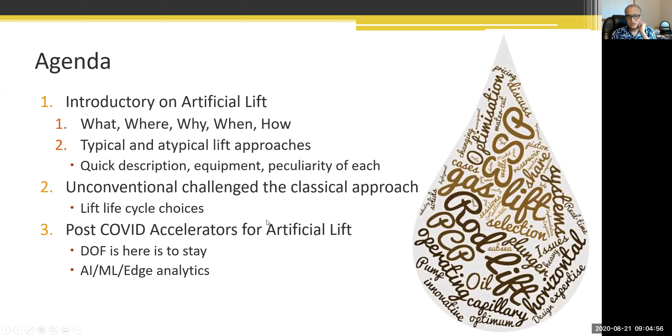Initially, when I was discussing with Salim doing this, I was thinking of doing a workshop. And I might still do that. And that workshop would be more like all of us trying to do something with machine learning. And maybe first quarter next year, we'll plan something along those lines once I have the necessary material in place.

So first things first: what, where, why, when, and how. And if you do not want to follow the rest of this material, your takeaway from this subsection should be: any oil or gas well in any operating environment, anywhere in the world, needs one or more lift systems during its life cycle. That's my one statement that tells you how important this technology is. Another thing that I should have added here is that most of the wells in the world stay on artificial lift for most of their life cycle. There are very few wells in the world that do not get impacted by artificial lift.

Considerations: when you talk about artificial lift, you have to focus mostly on the hydraulics. Of course, you have to know the mechanical, electrical side of the equation, and environmental, of course. And that's what makes artificial lift somewhat unique, in the sense that there is not a single discipline that teaches you. Even though people say, I'm a production engineer, you'll find that they will always have a niche area that they know about. Even within the artificial lift community, you'll find that some people focus exclusively on electrical submersible pumps, others focus on gas lift, and so on and so forth, because of this diversity of the knowledge that is required.

But the base thing is that we need to learn to work with the boundaries. Some of the boundaries are natural boundaries, meaning the reservoir pressure, whatever the reservoir parameters are, and some are man-made. Man-made meaning we have to focus on what type of infrastructure we are putting in at the surface. And then the last part is that artificial lift comes into being because we are trying to balance business needs against the system constraints, meaning what the reservoir can give us, what our facilities allow us to produce, versus what the business needs are. And that is the gap that artificial lift tries to fill in. So with that, takeaways.

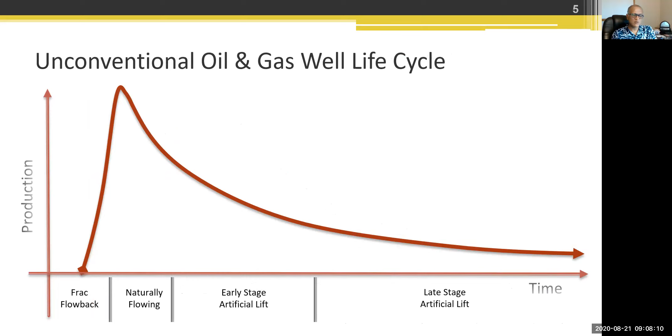But we have to keep in mind that this production decline is what forces us to think about artificial lift. Now, if the question comes up, how many wells in the world are in artificial lift? The statistics in the US have been fairly constant. World Oil has stopped publishing the statistics since '18 or so. But roughly every year they come back and say that between 500 and 550,000 wells in the US are on artificial lift. Okay, this number has remained constant in the US.

And my gut, based on the estimates that I see in the literature, is that this number has not changed even after 2017 or '18. On the contrary, that percentage might have gone up, I would think. Worldwide, this is an estimate from one of the service companies in 2013. The numbers in the US, it says about 540,000 or so. My estimate based on my consulting work and collaboration with other partners in the world is that the numbers in the US are fairly static, but in the rest of the world, it is increasing rapidly.

For example, I'm working with one Middle Eastern national oil company, and we are looking at just 1,800 artificially lifted wells in one country. And that is just one lift type, right? 1,800. I estimate that that particular country has more than 2,500 wells on artificial lift, whereas here we are showing almost the entire region having 2,600.

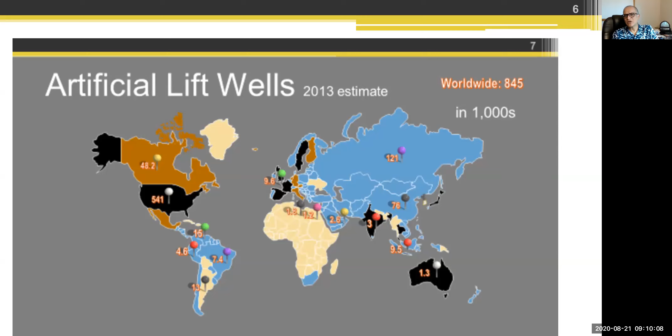Okay. So why do you need an artificial lift system? You need an artificial lift system in greenfield and unconventional for production acceleration. Otherwise, you can say that we have some field development challenges, infill drilling, EOR strategy changes. That's when you'll want to put artificial lift. But the conventional view has been that whenever we have tired production, reservoir pressure declines, water cut increases, that's when things get difficult. And I'll come back to this in a minute. So we need artificial lift to help the tired production.

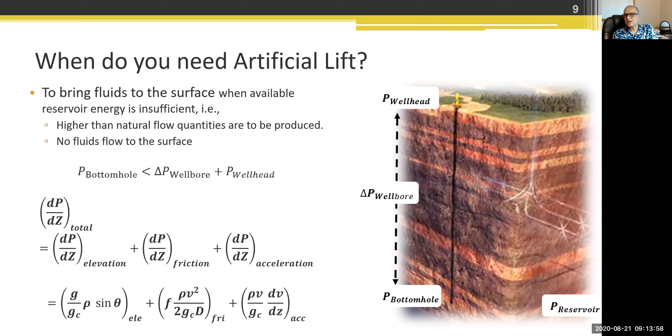So this is the only equation that I'm going to show in this presentation, just to make a point that this is all about the hydraulics, artificial lift. And you have to throw in some electrical engineering or some mechanical engineering, depending upon the lift method that you are looking at.

Here is a picture of the subsea. It is slightly more challenging, but the principle remains the same. You have to account for the wellbore losses. In case of subsea, you have to account for the losses from the seabed all the way to the topside. But fundamentally, all you are trying to do is how do we provide what is considered additional total dynamic head, or TDH.

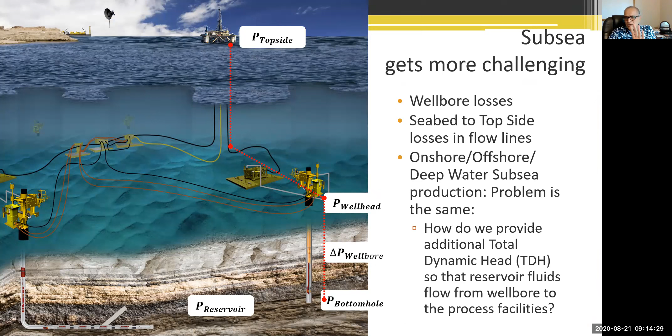So this is one new term. You said, wait, you never talked about TDH. What is TDH? Okay, so TDH is, as this picture shows, you have one boundary, which is the reservoir pressure, another boundary, which is the wellhead pressure. Now this wellhead pressure is influenced by your surface facilities, what type of flow lines you have, what type of separation pressures you need to hold. So these are the two boundaries that I would keep focus on for the time being.

Then as the fluids flow through the reservoir, you have bottom hole flowing pressure. Most of the artificial lift engineers focus on the hydraulics in this area, right? And they typically use a simpler expression for the reservoir flow, which is some kind of Vogel expression or straight line PI in some cases even.

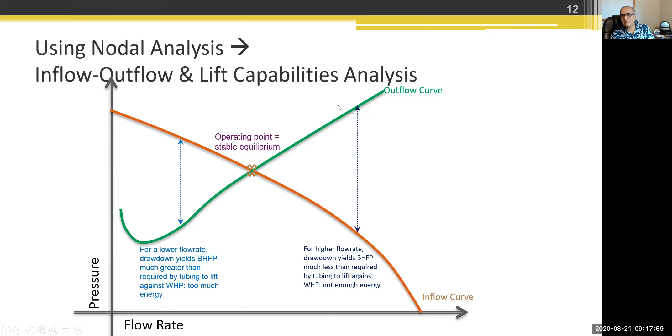And I do not want to belabor this point, but just one point: if you want to produce to the left of this equilibrium point, then reservoir energy is higher than what you need. If you want to produce to the right of it, then reservoir energy is less than what we need to produce. And typically, this is what you would identify as the total dynamic head. So instead of producing this quantity, let's say you want to produce this quantity, then this much additional boost you'll have to provide, right?

So this is the total dynamic head or boost required from the artificial lift system for that particular flow rate. The actual picture is slightly more complex than that, but for the purpose of our discussion here, this is what I'm talking about, how one can decide on the lift capabilities or what are the lift requirements, right? But the nodal analysis is the tool, okay? And again, I cannot emphasize this enough.

Any of these plots are just at one point in time, meaning one set of conditions. One reservoir pressure, one wellhead pressure, one water cut, one gas oil ratio, one tubing size, on and on and on. As we all know, things do change. And what changes? I'll come to that in a few slides, right?

So now let me go to the second part of my presentation where, now that we know why, what, where, when, how of the artificial lift, I will now focus more on how, right? So I'll give you some idea about what are the different types of artificial lift methods, what are the typical surface and downhole equipment requirements, and some consideration. This is the part where we'll be kind of sitting in the bullet train as the different stations will pass by.

Your takeaways from this section should be that these are all good lift methods when you apply them in the right context. That is one of the biggest problems. Most of the time, people have this mindset that just drop it and forget it. That is what we want to do. But in case of lift method, what may be good today may not be good tomorrow or over the entire lifespan.

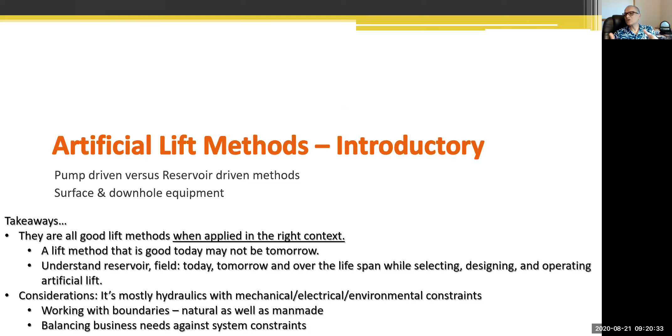So consideration, again, I'll repeat this, that most of these lift methods, you require some mechanical, electrical, and environmental. And by environmental, I mean broader than just the Greenpeace movement. We are talking about what is the environment inside the wellbore, what type of corrosivity conditions are there. And that is what dictates what type of chemical program you need, what type of material selection you have to make, and so on.

So when you think about artificial lift method, traditionally, what you're looking at are about 7 pictures, but effectively there are 8 lift methods. And I'll put the things in motion. The first one is the rod pump. That is the ubiquitous symbol of the industry. And that is where the maximum number of installations are in the world on this lift method. I'll not spend too much time describing each lift method. I'm just trying to bring up the picture to give you an idea about what type of different downhole pumping motions occur with different lift methods.

So the second one in the middle of the screen right now you're looking at is a progressing cavity pumping, or PCP. The third one is the electrical submersible pumping, and this will be in the loop, so you'll keep on seeing what is happening. The fourth one is hydraulic jet and hydraulic piston pumping. The fifth one is the gas lift. The sixth one is the plunger lift. The seventh one is the capillary injection. Let me cut down on some of these volumes here.

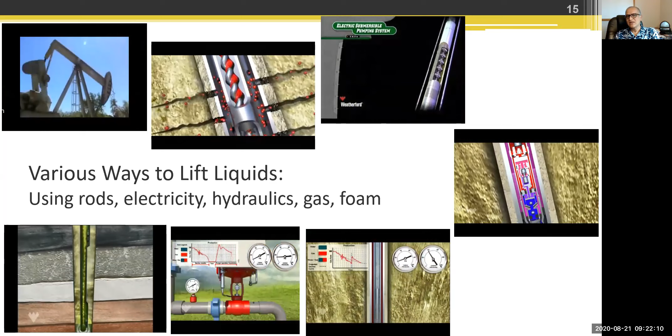Okay, so I'm going to keep this slide for slightly longer than what I would keep, just to give an idea about how these different lift methods have different surface setups and downhole setups, right? And as I describe the other individual lift methods, pay attention to that. If I have to use one particular lift method, do I need a workover rig or can I use it with wireline when I have to repair it? And these are the considerations that production engineers need to constantly work with when the lift system is in operation.

And here is one thing I'll tell you. Most of the production engineers are not traditionally taught these things. They somehow learn it from the old field hands. Because when you go to the engineering school, even if you go to petroleum engineering school, what you're taught are typically just some of the outlines. You're taught some of the design processes very superficially. And I know that because I am teaching one of those artificial lift classes, right?

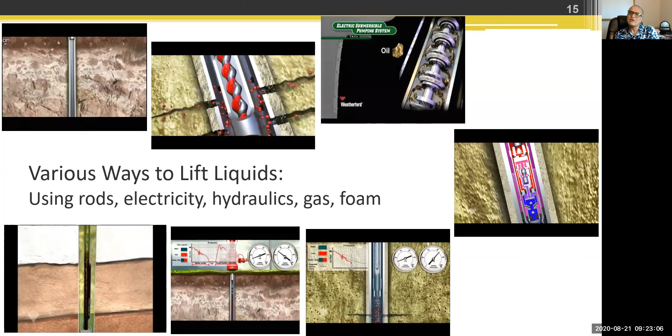But when the same engineer goes to the field, all of a sudden they are exposed to so many field conditions, so many constraints that they somehow get lost. And then they end up making suboptimal choices in spite of that training. And this is one of the things that I've been constantly discussing in the last 15 to 20 years of my teaching all over the world, not only artificial lift, but different nuances of that.

Okay, so when we come back to the different classification of these lift methods, we can put them in two buckets in terms of the energy source. On the left side, you're looking at what is called plunger lift, foam lift, and gas lift. These three lift methods are primarily driven from the reservoir energy consideration, and the lift methods on the right side,

Just a sec, I see something going on in the chat. Hopefully I'm not expected to answer those right now. If we can keep those questions until the end, that will be good. I don't know, what is our protocol? Are we breaking somewhere in between for some questions? No, Rajan, as you go on, people can put their questions in the chat anytime, but once you finish your presentation, after that, we'll go with the Q&A. Okay, perfect. Very good, thank you.

So coming back to this slide, what I'm trying to point out here is that depending upon how we are providing energy to the artificial lift, we can put them in two buckets. So on the left side, plunger, foam, and gas lift are primarily reservoir-driven methods, meaning the energy source is primarily the reservoir. Whereas on the right side, all the lift methods have pump in their name. Rod pump, piston pump, progressing cavity pump, jet pump, electrical submersible pump.

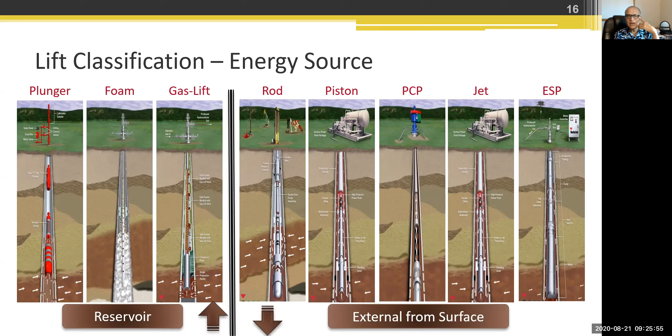Okay. Now let me give you another way of classifying these lift methods, which is based on the liquid production capacity. Again, lift works on lifting the liquid. It doesn't care whether it is lifting oil or water. It has to lift liquid. And one of the secrets of the world, and not a secret, we all know that most of the wells in the world are lifting a lot more water than oil, right? Particularly in North America, and to a large extent, I'm seeing that trend around the globe also.

So in terms of the liquid production capacity, plunger and foam lift fall into the lower end of the spectrum, meaning typically less than a couple of 100 barrels of production. You might have a few outliers here and there that might say, I can produce 300 or 400. But most of the wells on plunger and foam lift would be typically producing less than 10 to 20 barrels per day. On the other end of the spectrum, you have jet lift, ESP, or gas lift, that can go, theoretically speaking, as high as 30, 40, 50,000 barrels per day from a single well, right?

In between, middle of the road lift methods are piston pump, progressing cavity pump, rod pump, and they typically are known for producing quantities less than 1,500 barrels or so. Now, having said that, you also have to keep in mind that there are upper end systems available that can produce at the lower end as well. Until about a few years ago, the thinking was that ESPs are good for producing more than 1,500 barrels per day. But nowadays, if you go and talk to any ESP vendor, they say, oh, we have a system that can produce even 50 barrels per day.

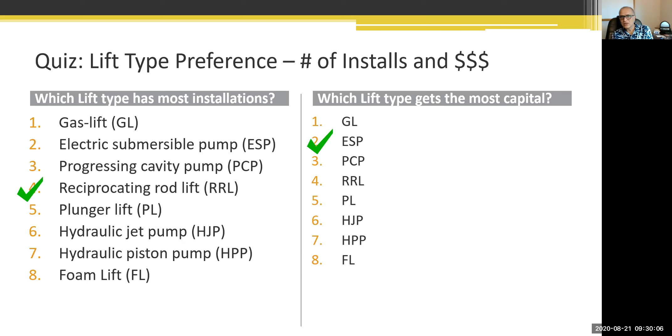And if you answered ESP, then that is correct. So here is one thing that tells you that even though we have most installation rod lift, ESP gets the most capital. Now this slide is courtesy of a research company called Spears and Associates.

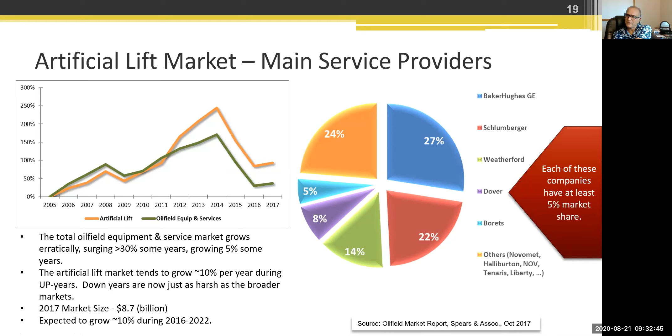And if you see Baker Hughes, Schlumberger, and Weatherford, where they're getting most of their revenue in the artificial lift segment is ESPs. And that goes back to my previous slide where I said that ESP gets the most capital. And to support it further, what you're looking at is, again, courtesy of a Spears and Associates research report. What you're seeing is that out of 100% of the spend year to year, the largest one is ESP.

Okay, the question Rafat asked, I'll just address it right now. What do I mean by most capital? Meaning, if you add up all the spend on a year-to-year basis, then the spend on ESP is the highest. It is not that the technology is just more expensive. But we can have more discussion on that, Rafat, later on during the breakout.

Okay, so now I have another question. Which two lift technologies produce the most oil? Rod lift, gas lift, PCP, plunger lift, ESP, hydraulic jet pump, piston pump, and foam lift. If you've locked in your votes, I'll just move forward. The answer is gas lift and electrical submersible pump.

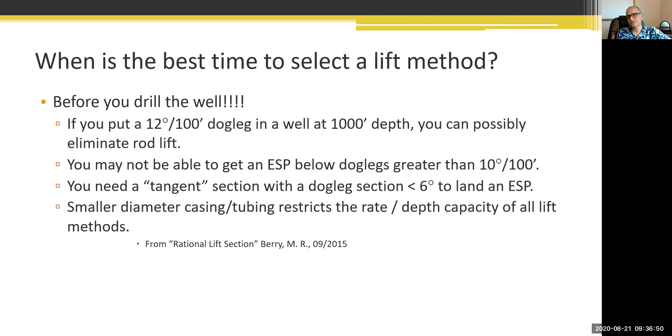So anyway, the point is that before you drill the well, you should be thinking about the lift methods. Actually, lift methods should be part of the field development planning process. Okay. Moving on.

When you think about artificial lift, whether you are at the selection stage, design stage, or the operational stage, you have to look at which type of asset this particular lift method would be operating in. Is it a maturing field, greenfield, unconventional? Then where is this well located: is it onshore, offshore, subsea, is it hot or cold? And what do we mean by hot or cold? Do you have any type of cyclic steam stimulation or steam assisted gravity drainage going on?

And believe it or not, when I was visiting Kenya, I came across some geothermal wells where they were also using ESPs. And as you can realize, some of those geothermal wells can have temperatures upwards of 200 degrees Celsius. So you have to think of the location where the artificial lift would be lowered. Location is also important in the sense that if the location is very remote or at a hilltop, then how would you bring the equipment over there, or how would people access that location on a regular basis?

Then you have to think of what type of PVT and what type of phase envelopes the well would be dealing with on a year-to-year basis. Is there too much or too little gas? Lots of water coming in? Is it going to be heavy oil or light oil? Is it going to be sandy oil? Or what are you going to do about the nasties like H2S, asphaltene, CO2, and so on and so forth, right?

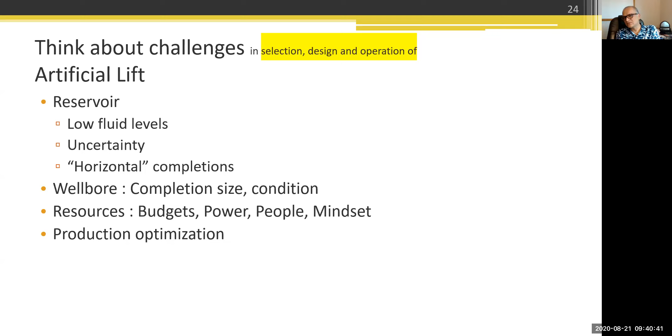Production optimization is also becoming more and more important. I've been talking about this topic, production optimization, since 2007 or so when I joined one of the service companies that I was part of. And at that time, I would put people to sleep when I started talking about production optimization. And this is production optimization from the production engineer's perspective, right? And nowadays, it seems that there are lots of companies that talk about doing this using edge devices, AI, ML, analytics, and so on and so forth. We'll touch upon that briefly.

Okay. So what are the time-related factors that you need to take into consideration when you're talking about selection, design, or operation? As we know, with time, reservoir pressure, productivity, and production are going to go down. Appetite for capital expenditure is going to go down. And then you have competing demands from completion changes, surface facility changes. And then there might be enhanced recovery approaches that would also require some CapEx, right?

On the other hand, on the PVT and phase envelope side, water cut, GOR, and viscosity would be increasing as the gas comes out of solution more and more. Facilities would age, the well would age, meaning you have integrity issues, you have flow assurance issues, and then you have to take care of corrosion, scale, sand, paraffin, asphaltene, hydrates, depending upon your environment. So these are all the factors that you have to keep in mind as you are designing, selecting, operating artificial lift, or thinking about switching from one lift method to another, right?

Some more factors, as I already touched upon the people and money aspect earlier. Your need for operating resources is going to go up as the wells age, facilities age, right? Whereas the availability of qualified operating resources will go down. Think about it. As you look around operating companies, where are most of the qualified people sitting? In the field development group. And once the field is in operation, what quality of people are sitting on the production side? Unfortunately, we do not have that many qualified, at least that has been my observation. And then, as I said earlier, the attitude for adopting different approaches, if it doesn't go down, it does not change. That is what I see, right?

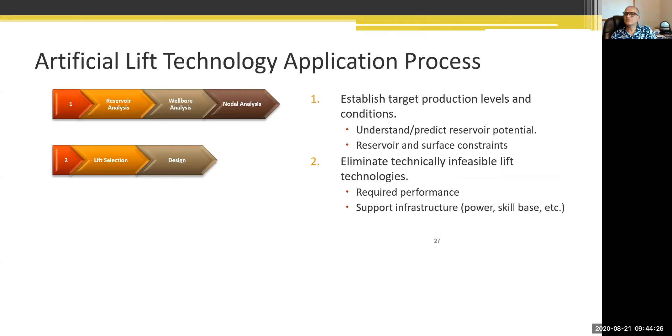What I'm seeing often is that this function, the second part, the design function, is being transferred over increasingly to the service companies. Operating companies are saying, hey, you go and do it. Now, service companies, they have different competing pressures. I was part of that, right? So I know what could be positive and negative over there. So that's where I'll stop with my comment.

Then comes the economic evaluation. You have to look at not only acquisition, but training cost, installation costs, how we are going to change our people to adapt to the new lift mindset if we are going to put in new lift, right? What are the operating costs? What is the reliability of the equipment? How we are going to replace them if we need to replace them.

So these are all the considerations that need to go into the artificial lift technology, whether you are just selecting it or you're switching over or you're already operating it, right? And the final part, the optimization approaches. This is where digital oil field related concepts come in, and I can start throwing all the acronyms that I have alluded to: AI, ML, dashboards, and edge devices.

But the idea is getting access to how my well is doing now, what I need to do so that things do not fail, what I need to do so that things continue to work the longest possible, and so on and so forth. Okay, if you are interested in pursuing this further, this is a list, rather incomplete list, of commercial software available out there.

And notice one thing, that there is not just one software that addresses most of the lift methods. Now somebody may agree or disagree with me, but in my experience, what I have found is that each software will have its own niche area, and this landscape is changing. So now you can see how the lift world is subdivided. So an ESP engineer may or may not be able to work comfortably with gas lift because they do not understand the concept. They may not have used the workflows in that software.

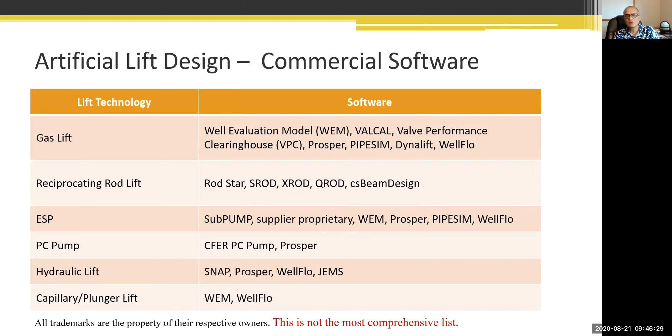Having said that, I must also remind you that the vendor community, the people who are making this equipment, they have come a lot farther and they are being constantly challenged to push these boundaries even further.

Whereas with most of the gas lift valves, the production would be coming out of the tubing. Okay, so that is a very brief description of gas lift in a nutshell. We are using gas to reduce the density, and by reducing the density, we are reducing the bottom hole flowing pressure, which in turn allows the reservoir to send more fluids into the wellbore. So the primary production driver here is the reservoir energy, okay?

Moving to the downhole components, I already referred to the two, and I pointed out that there is a side pocket mandrel. This is the picture of what is called a side pocket mandrel. There is another type of mandrel called conventional mandrel. The difference between the two is that this one has a kind of kangaroo belly type of thing, whereby there is a distended section or oval section, a pocket, which basically holds the valve, whereas in the conventional mandrel, the valve is hanging outside on the lug. So mandrel and gas lift valve.

So the design problem for gas lift, as far as the wellbore is concerned, is at what depth we should lower this mandrel, what size of the valve we should lower in, what should be the orifice inside that gas lift valve, and what type of gas lift valve. Other design decisions could be what should be the available injection pressure, because that available injection pressure also determines at what depth we can lower.

And then there could be a whole host of other decisions you have to make, what type of compressor you have to use. But this is not my gas lift class, so I'll just stop myself. So the design involves depth selection for the mandrel and size of the valve. That is just one simple thing.

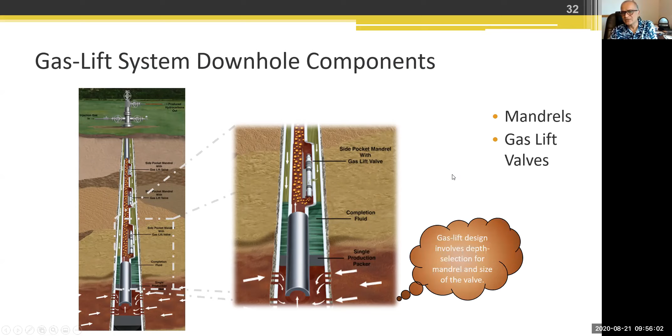Here is a picture of what is called a conventional mandrel and what is a side pocket mandrel. And this shows clearly that the flow passage is the same in both cases, except how do you access the valve? And this is one important thing to note, that if you have to change the valve, then here you can use a wireline procedure to pull the valve out of the hole. In this case, you have to pull the entire tubing out of the hole. And that is the difference between conventional and retrievable mandrel.

Most offshore installations, or installations where it is expensive to service the valve by workover, would go for a retrievable mandrel type of installation. For most onshore wells, people go for conventional mandrels because conventionals are cheaper.

Okay, here is a brief outline of what well site gas lift equipment is. This is more of an advanced setup. It is not as advanced as I would like it to be, but still it is advanced. Most of the time we have some type of 2-pen chart recorder. That was in the old days.

If you are old enough to remember that, then join my company.

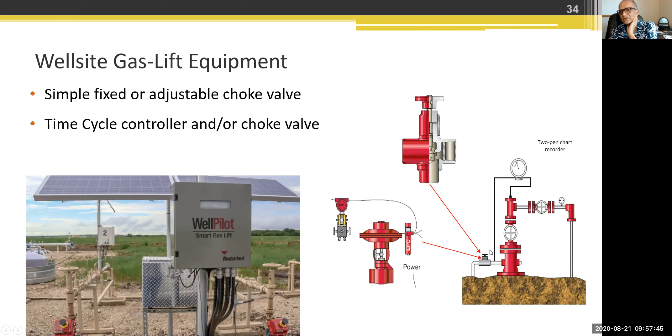And then you have some sort of injection choke here. Now this choke could be manual or it could be adjusted from a remote location. There could be a time cycle controller based choke. And the whole function of this choke is to regulate the flow inside the casing tubing annulus, right? And it is managed by measuring the differential between the tubing pressure and the casing pressure and such. So this is a brief intro to gas lift.

And here you are looking at the gas lift wells on the pad. And what you're looking at here is all the measurement related to the gas lift injection quantity, how much we are injecting in each of these wells. So this pad-based development requires you to have some compression facilities on the pad itself, unless you have some centralized compression. And these are some of the debates going on in the production engineering community, particularly as we now have those super pads coming up with 12, 15, 20 wells on one pad and so on and so forth.

There are two types of gas lift, continuous gas lift and intermittent gas lift. Most of the time when people say gas lift without qualifying it, they mean continuous gas lift, meaning you are injecting gas into the production stream continuously. In intermittent gas lift, you are injecting it intermittently.

So what do we want to achieve in continuous gas lift? You want to inject gas through the lowest possible gas lift valve. Lowest possible gas lift valve, that should be our goal. We want to prevent multi-point injection, meaning we do not want to waste the gas whereby gas enters here or here at the same time.

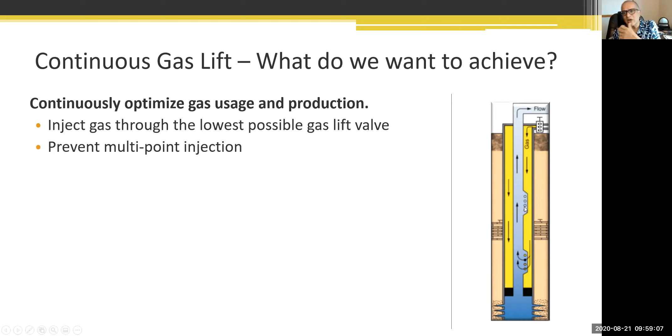We want to enter it only from the deepest possible point, because that is when you are utilizing the energy most, okay? You want to provide optimum amount of lift gas. Too little gas, meaning your production will not be coming out as much. So there is a production deferment. Too much of gas, you're wasting your compression energy at the surface, and that gas is not coming. On the contrary, in some cases, it can contribute to some friction losses that you do not want.

So this one slide talks about what is a continuous gas lift optimization problem. Details are always devilish, as somebody says. So there are lots of things, but gas lift is one lift method where you have to have very strong understanding of hydraulics as well as the reservoir performance and surface network performance.

Okay, typical gas lift application scenario: as you can see on the left side, you are looking at the picture from Weatherford about the surface, onshore gas lift. On the right side, you're looking at some subsea gas lift. So point being, gas lift has been used in all parts of the world, remote locations as well as subsea locations. It is used in long perforation intervals.

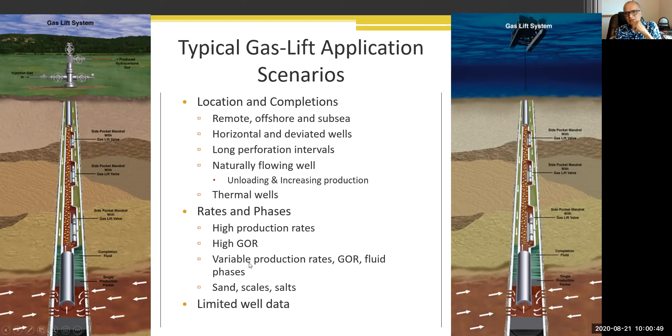Naturally flowing wells even also use gas lift on an intermittent basis. In lieu of swabbing, people sometimes just trickle in some gas with the nitrogen cylinder to kick off the well, for example. In thermal wells also they use gas lift, and I'll not read all of that, but these are the typical gas lift application scenarios.

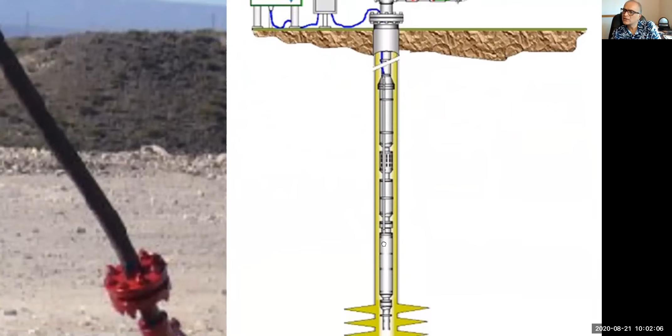High voltage situations, you're looking at voltages in excess of a few thousand volts, downhole voltage, right? So this requires qualified electrical engineers' intervention in addition to the petroleum engineers' intervention. What you're looking at is a cable that is strapped typically on the outside of the tubing. And that cable goes all the way to the bottom. There's a motor here.

And let me go to the next slide that explains slightly better than what I'm trying to hand wave here. So again, starting our journey from the top, there's a cable that comes on the outside of the tubing. At the end of the tubing, typically, the ESP, the entire assembly is hung. The topmost part of the assembly is called pump. Okay, that is where most of the lifting work happens. Then there is an intake. There may be a gas separator device here also.

Then there is something called motor seal or motor protector. And then you have motor. So motor is at the bottom in the conventional setup. And then you have a downhole sensor package. So ESPs being some of the most expensive installations from the beginning, they were the first artificial lift methods to get the downhole sensing packages. Nowadays, people are lowering downhole sensing packages in almost all types of lift methods. But ESPs were the first one.

The reason being that the power cable can also carry the signal from downhole to the surface. So reservoir engineers also love ESPs because they get to keep their fingers on the pulse of the well. But coming back to the machinery itself, it's a submersible pump like what you might have seen in some of the water wells, except that these are highly sophisticated devices.

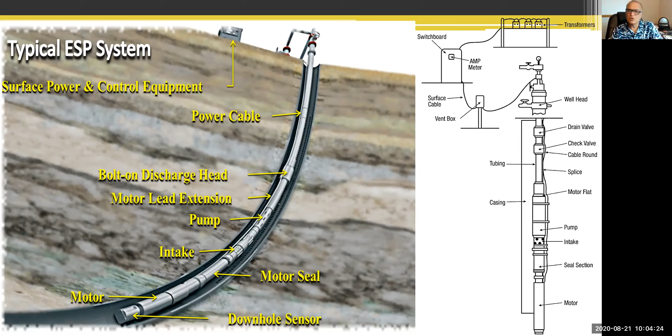Visualize you have about 5 to 6 inch outer diameter, and you are trying to generate a TDH, or total dynamic head, to the tune of almost 2 to 3,000 PSI, which is equivalent to about 7,000 or 8,000 feet of water column, right? So these are very smartly engineered, and the basic design has not changed over the years. The material of construction has changed a lot, and systems are now available that can handle some of the harshest conditions. At the same time, they can also operate over the widest range of flow rates and flow conditions, right?

Here is a small animation that was originally prepared by Weatherford, and then Petrobras went in and made it with slightly better colors and better music. What you're looking at is downhole, how the cable has come in, in the blue. You have pump, you have separator, and you have motor. You'll get some words in Portuguese here. Bomba is pump, admissão is intake, and protector is protector or seal section.

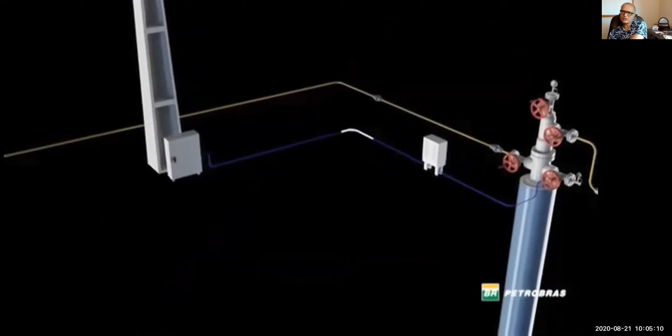So the motor is energized. So there's a shaft inside the motor that starts turning. And this shaft is coupled to the shaft inside the protector section. As you can see, the expectation is the gas and oil mixture will come inside the intake section, which is in green here. And then if there is a separation going on, then the gas will come out on the annulus on the back side.

And now you have a pump section. As you can see, it's a centrifugal device, centrifugal pumping device, basically. And that is our very quick understanding of how this device is supposed to work. So the takeaway is that you require significant quantity of electrical power.

You have to connect those devices inside the wellbore, which are hung at the end of the tubing. Meaning, if you have to change ESP or ESP fails, then you have to call a rig on the well site. And this has been one of the biggest concerns of some of the companies of the world, Saudi Aramco and Kuwait Oil Company, the companies that have some of the largest electrical submersible pumps, including some of the companies in the North Sea as well as in the Gulf of Mexico and in Brazil also, where some of these pumps produce as much as 20, 30,000 barrels.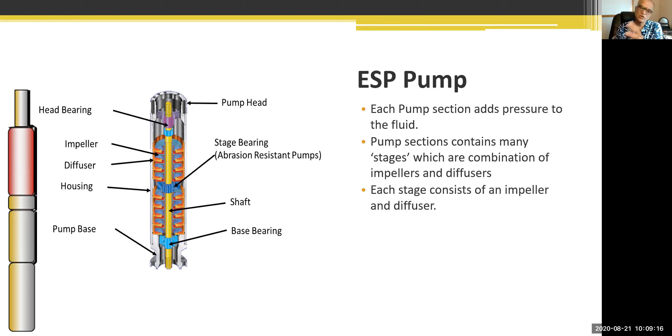Okay, here is a bit on the electric motors. There are significant advances in this technology. Traditionally, it has been induction motors, squirrel cage, 2-pole, 3-phase type of motor, run at 60 hertz here, 50 hertz in other parts of the world. But it can run over a wide range of frequency, and that is what allows us to produce different quantities of fluids from the wellbore if you have what is called a variable speed drive at the surface. The relatively recent advance in this technology has been the introduction of what is called the permanent magnet motor, which is more energy efficient and shorter.

And shorter is very important because as we go through some of the deviated well bores, some of the horizontal well bores with extremely high dog legs, you require as short an assembly as possible. So then your question should be, what is the assembly length in this case? It could be as high as 100 feet, 150 feet, 200 feet, depending upon the number of stages that you require in order to produce the quantity, right? So ESPs have some of those challenges.

Of course, ESPs are also used in some of the most challenging environments, like up north of the border, where they are producing bitumen. They use SAGD, steam assisted gravity drainage, and there the temperature could be as high as 500 degrees Fahrenheit or 260 degrees Celsius and such. So this is where now ESP vendors have come up with designs that can operate in those harsh environments.

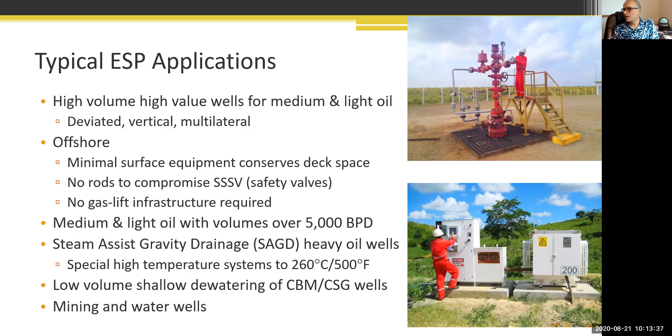And ESP is used not only in oil and gas, but also in mining and water wells. Actually, some of the largest ESPs are in mining applications, where those ESPs can remove as much as 150,000 barrels of water out of a mining shaft in a matter of days. And as you can see, mining shaft volumes can be significantly higher.

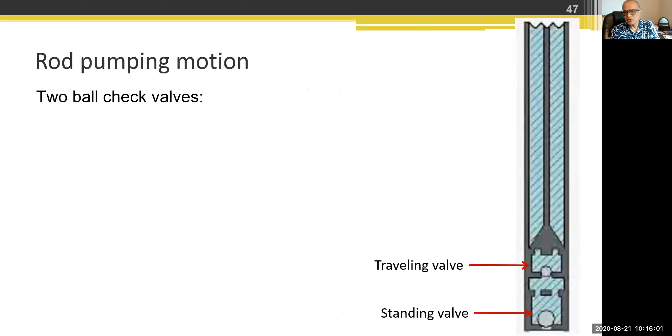Again, we need a pump that can provide sufficient, what's the keyword? TDH, total dynamic head, okay? So here we are focusing only on the pump side of it. So it has 2 valves inside, what is called a traveling valve and standing valve. I'll not bore you with all the details, just I could not help but show how the fluid from below the pump enters into the pump chamber, and then the synchronized motion between these 2 valves, traveling and standing valve, allows to transfer that fluid from inside the pump chamber to above the pump chamber.

Why is this lift method so popular? Because most of the investment for this lift technology is on the surface that is easily accessible, number one. Number two, the mechanical device is relatively simple. There's a gearbox at the surface, and then there are some lever type of arrangements, class 1 and class 3 levers. So all you have to do to maintain this device at the surface is change the gearbox oil on a regular basis and provide some type of lubrication for the bearings. Plus at the end of its useful life, you are still left with lots of iron that can give you some value.

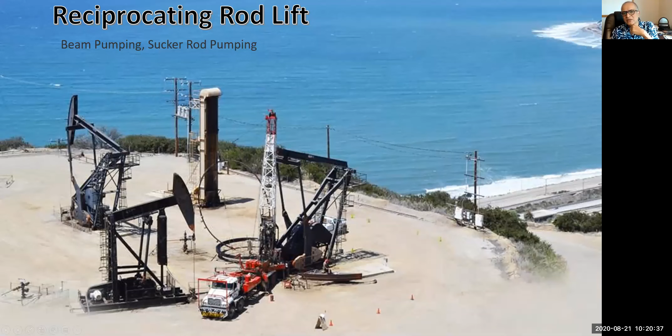There is also what is called a continuous rod, which I think there's a picture in the beginning that I showed you. So here you see this. This is a continuous rod that is reeled around a wheel, and it is delivered to the well site like that, whereas those regular rods are delivered on the flatbed in packs, I've forgotten how many they put in. So here, similar to the coiled tubing setup, they also have a coiled rod setup. There is a gooseneck, and you are literally injecting the rod inside. So that is a different type of rod mechanism. So let me now move further.

So what do we want to achieve when we have a rod pumping machine? It is that you continuously produce as much as the reservoir will provide. This is a key thing, as the reservoir will provide, because rod pumping systems are working on the wells in this part of the world. Most of the wells that are on rod pumping do not produce continuously because your reservoir is tired.

So you let the influx come in for some part of the day, liquid level builds up, you run your pump, and then you shut it down and let it rest and let the reservoir catch up a little bit. So that is how the majority of the wells work, but then there are some wells where you can produce continuously, right? And in some cases, if you have what is called a variable speed drive, then you can increase the pumping speed when the well is capable of producing more than the lifting capacity that was sized, right?

Then there are a few other considerations, what is called a fluid pound condition. Especially if you have a tired reservoir, it is possible that as your pump keeps on working, the reservoir would not fill up the entire pump, right? In that case, as your plunger is going down, it will hit an empty space that is not filled with the liquid, and then all of a sudden it will hit the liquid. And that is called a fluid pound.

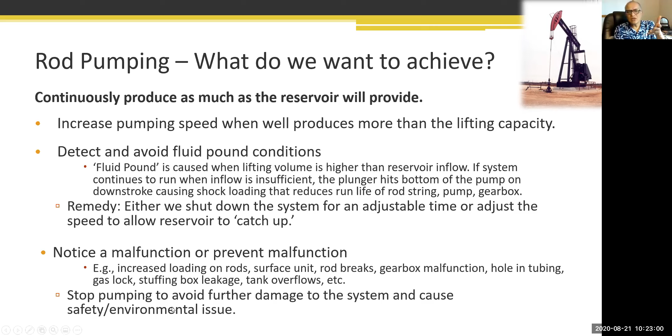So lots of optimization activity related to rod pumping is focused on this. How do we avoid this type of situation from happening? And how do we notice a malfunction? There are a variety of things that can be talked about, but this is not the time or place. We do not have enough time.

So in summary, rod lift can be used in a variety of applications, but remember they are used only in land applications. So you say, why? Because of the rod. We have not come up with a reliable design of a subsurface safety valve, which is a must in all offshore and subsea installations, meaning you cannot use rod pumping where you require a subsurface safety valve.

Reason number one. Number two, as you can see in the picture, the surface pumping unit can take sizable space. There is a lot of vibration, and you'd have to make so much space on the platform that you would not be able to accommodate rod pumping. I have seen one or two examples where people have tried to put it in extremely shallow water, almost like a lake, but it is usually never done in offshore applications. In offshore applications, typically ESP, gas lift, and PCP are the lift methods being used.

Okay, it is good for producing medium and light oil from any depth. You can also use it for heavy oil, but then you have to heat up the well fluids by using either steam flood or CSS, cyclical steam stimulation, or SAGD. This is a very versatile lift method, and that's why it has stood the test of time. It will continue to be, because you can use it in markets where you have infrastructure and experience, as well as in markets with limited skills, services, and resources.

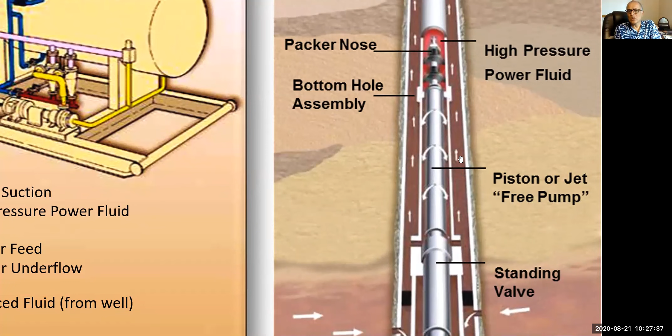And here is another picture from Weatherford, and let me see if I can blow this picture up. In this particular case, the red color is the power fluid. That is the convention. So the power fluid is injected inside the tubing, and then there is a bottom hole assembly in which the pump sits, either a piston or a jet pump, and then the pressure is built up, and you are going to have a mixture of this power fluid with the well fluid. Well fluid is coming from the reservoir. So the pump provides the necessary TDH to bring both of these fluids to the surface.

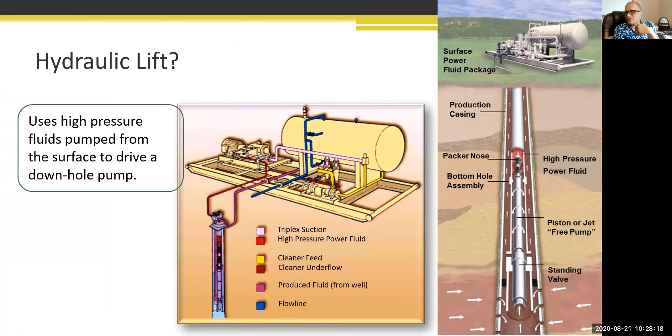This lift method was somewhat marginal until the beginning of the century. And when the horizontal wells and the unconventional revolution started, the jet pump particularly became one of the lift methods used heavily for the initial kicking off of the well, because we are pumping so much fracturing fluid down that needs to be evacuated before production can begin. So that is what completion companies often do.

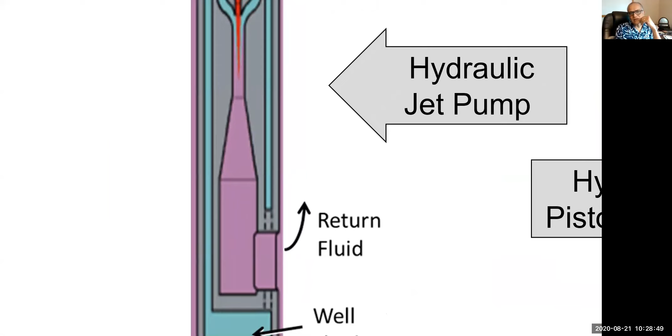So there are two types of pump possible. There is a hydraulic jet pump and a hydraulic piston pump. If you focus on the hydraulic jet pump, you might have seen nozzle venturi devices in measurement. So this is a nozzle venturi type of pump, which relies on the momentum transfer from the power fluid into the wellbore fluid to get the higher TDH.

Whereas on the right side, you are looking at the hydraulic piston pump, where the pistons are driven by the power fluid. Now, both of them are hydraulic, but the jet pump has the ability to transfer larger volume. So typically the jet pump is in the upper end of the spectrum. The hydraulic piston pump is in the same spectrum where rod lift and the PCP sit, right? So the hydraulic piston pump is good for up to maybe 1,000 barrels or so of liquid production. Whereas for the hydraulic jet pump, one of the largest installations that I know of, offshore subsea Tunisia, was 32,000 barrels per day of production.

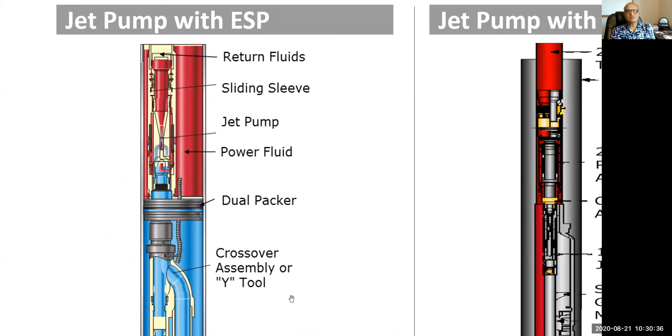I brought this in to mention one thing. With all of these lift methods, oftentimes people wonder, can we use a hybrid lift, meaning a combination? And the jet pump is amenable to work with other lift methods, and sometimes it is used as a backup. So for example, in this particular case, on the left side, you're looking at the jet pump with the electrical submersible pump. And the idea is that if the ESP is not strong enough, or if the ESP has failed, then the jet pump can continue to work.

The beauty of jet pump is that you can retrieve it just by circulation. You do not require any big workover rig, or you can do it wireline, but most of the time people do it by circulation. That's why jet pump is preferred in many of these installations.

Here we are looking at jet pump with the gas lift, and this installation on the rightmost is used by BP in Alaska, or it used to be, I don't know whether they do it still or not, where one formation is supplying the power fluid to drive the jet pump to produce from another formation. So this is a kind of interesting inverted jet pump application. Okay, so that is a brief on the hydraulic pumping method.

Now let's move on to the next lifting method, which is a progressing cavity pump. People often refer to this as a progressive, and I have a beef with that. I don't think that is a correct nomenclature. It's a progressing cavity, and you will see why I'm insisting on that.

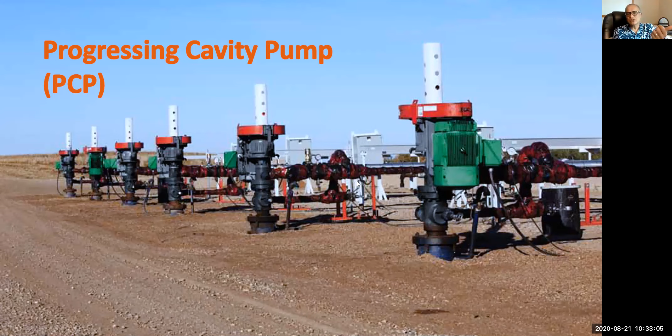But unlike reciprocating rod lift, where the rods move up and down, here rods rotate. So in a way, you can think of this as using the centrifugal motion, but it's not the same as centrifugal motion. So again, what you're looking at is called drive head at the surface. There is also a polished rod and stuffing box. And this rod is rotating, as I said, not reciprocating.

And then down the hole, what you're seeing is the similar rod string, except the couplings that are being used here in the rod string have a different requirement, because here they are facing a lot more torque variation compared to the sucker rod pump. And then at the end, you have what is called a PC pump or progressing cavity pump.

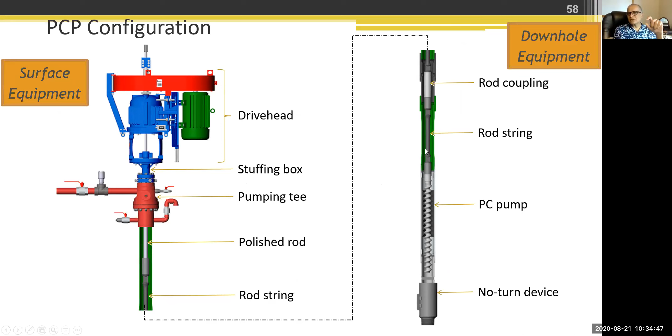This is a traditional application. Nowadays, we have a new application whereby the entire pump is suspended at the end of the rod string, but those are few and far between. What you're looking at here, the rotor is typically a helical structure of one lobe. And then the stator is a complementing helical, but with two lobes, right?

Now, if you have worked in the drilling side of the business, you might have seen some of those mud motors. There also you have helical structures like this in the mud motor, but there the number of lobes is more than one, okay?

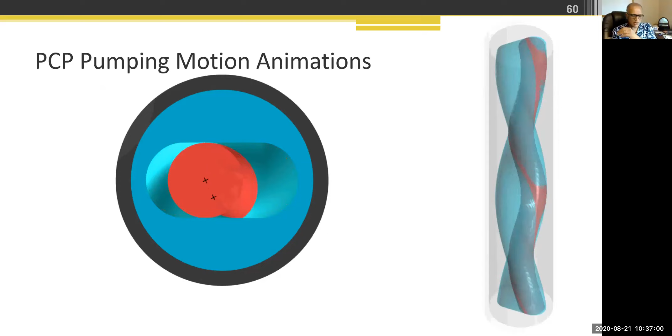Okay, moving to the next one. This is the specialty that I was referring to earlier, that PCP can handle viscous fluids up to 100,000 centipoise. For reference, water is 1 centipoise at room conditions, motor oil 40 is 200 centipoise, honey is 10,000 centipoise, and ketchup is 50,000 centipoise. And many of us know how we have to get the ketchup out of the bottle sometimes by thumping at the back, right? So that is the specialty of PCP, to handle such a viscous fluid that would not even flow if you tilt this beaker, right?

Another thing is that because of the construction, the stator is made out of elastomer. Elastomer is a flexible, resilient material. So whenever some sand particle comes in between the rotor and stator, the elastomer gives a little bit and lets that solid particle pass by. So it can handle sandy conditions up to 60% by volume, not continuously, up to 20% or so. Now for reference, whenever people in conventional production say they have sandy production, the sand content may not be more than 2 or 3% by volume. It's only in Canada, where they try to create the wormholes, meaning they are producing sand along with the heavy oil, that they require this ability.

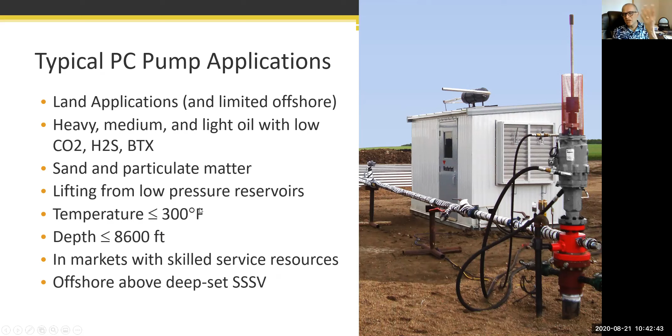So that's where it loses its edge. Now these ESPCPs are used in offshore Brazil, where they have some of the highest viscosity crude. And being a subsea development, they cannot use other methods, so they oftentimes use ESPCPs.

So now we are switching gears. So far we have been focusing on all the lift methods that are focused on higher liquid production. And what do I mean by higher? More than 10 barrels per day type of liquid. Now we are going into the gas well territory lift methods.

But what is the central problem in gas wells? In gas wells, as we all know, there is always some connate water that comes, or even condensate. As the pressure drops and temperature changes, the condensate comes out of the solution and it will start falling back because condensates are heavier compared to the gas. If the gas cannot carry the condensate out with it, then over time you will have more and more liquid accumulating at the bottom.

Initially, gas pressure would be high enough. It will struggle through, come out in bubble form, and it will produce. So on the surface, it will appear that gas is coming out and there's no problem. But downhole, inside the wellbore, you have liquid accumulating. Over time, if you do not do anything about it, as the liquid column gets higher and higher, you will notice that not only has production declined, but production would be erratic. The flow rates would be constantly changing. And that is a surefire sign that your liquid loading has gotten worse.

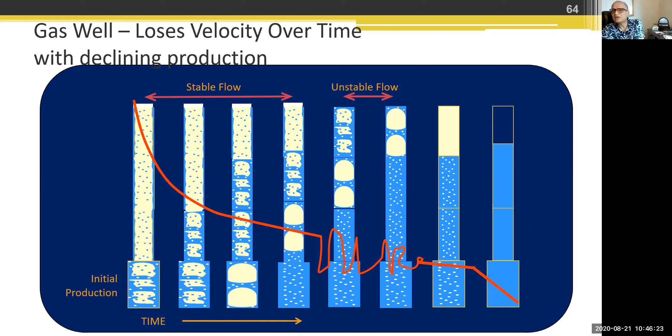I still remember I was at an in-house conference in one of the North African countries. There was a gentleman sitting next to me. He was a geophysicist. And he said, Rajan, why are you talking about this here? We are all gas production. And then I had to explain what gas well deliquification is all about. But anyway.

So the idea behind deliquification is very simple, and most people attribute it to the Turner equation, or Turner-Coleman equation, which relies on two things.

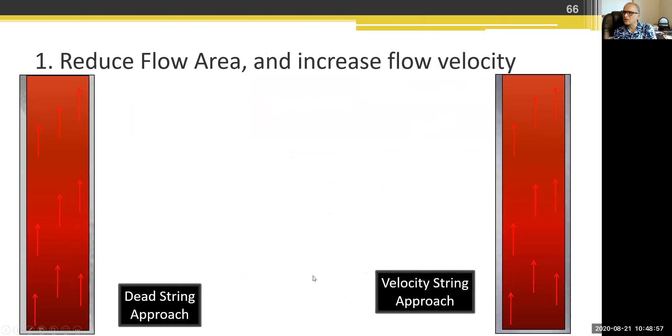So here is one approach called dead string and another called velocity string. In dead string, to reduce the flow area you are lowering a tubing which is blocked off at the end, meaning you are forcing the production to go through the annular space. Before lowering the string, your gas was flowing through the entire casing space. This is how most gas wells start their life, right? Then once you lower the string, you are reducing the cross-section area, you are increasing the velocity, and that is what allows you to carry the fluid out of the hole.

In the velocity string approach, it is exactly opposite, meaning you are lowering the tubing just like the dead string, but rather than blocking the tubing, you are blocking the annular space, forcing the fluids to go through the tubing. So depending upon how much liquid you are trying to lift, you will go with dead string or velocity string. But keep in mind, these are stopgap arrangements, okay? And that's where the question comes up of what else we can do to remove the liquid. You can use any of the methods I talked about so far. People have used gas lift, ESP, rod pump, and so on. And I'll come to that.

But one thing you can do, and this goes back to the Turner expression, where we saw that the critical velocity is proportional to the surface tension, and that's where foam lift comes in. What you're looking at is a surface injection of a surfactant. Surfactant is an acronym for what? Surface active agent, right? So surfactant is introduced into the wellbore, and it can be introduced in multiple ways. You can drop what is called a soap stick, literally. Rather than bars of soap, you have sticks of soap.

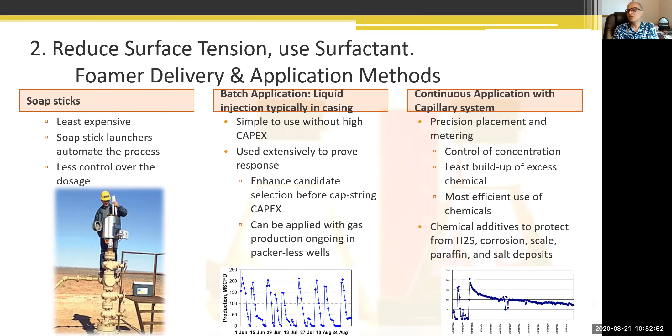That brings us to the next, and I think this is the final lift method that we are going to talk about, plunger lift. Next to the rod pump wells, the maximum number of wells, if we take count, nobody has kept that count, but my gut is that next would be plunger lift. Plunger lift is used a lot in this country for deliquification of gas wells, but it can be used for producing liquid from oil wells as well.

And if you recall, in the very beginning, I said that in the energy-driven classification, plunger lift, foam lift, and gas lift, these three lift methods are driven by reservoir energy. And plunger lift takes the cake in the sense that it is the least expensive of the lift methods. And that's why when you have stripper wells producing less than 10 barrels of liquid, this would be an ideal lift method, provided you have sufficient gas that can drive the plunger up, right?

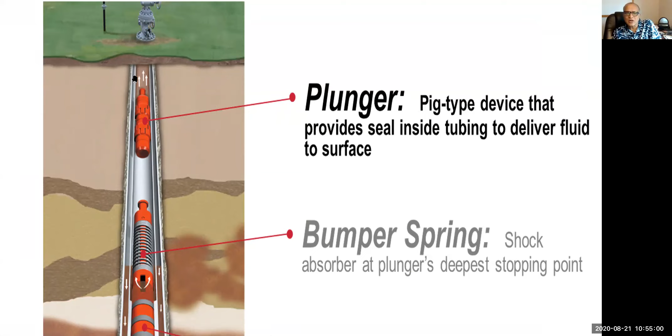Okay, so when you look at the downhole component, you have the plunger. As I said, the plunger looks more like a piston here or a pig. If you are working in pipelines, you might have come across pig type of devices, right? So it essentially seals the surfaces so that the liquid that is captured above it can come to the surface as the plunger travels to the top.

At the bottom, there is something called a bumper spring, which is lowered using wireline methodology, okay? And then there is a landing tool which sits inside a pump seating nipple or in some kind of profile. So this bumper spring, whenever the plunger goes back down, kind of arrests it here, and there is a spring here that absorbs the plunger's shock. So this is the setup inside.

When you come to the surface, as I said, it has a slightly different setup, okay? What you're seeing is a lubricator. It's called a lubricator. Just like you also use a lubricator in gas lift to insert and take out the gas lift valves and such. But here the lubricator stays permanently on the well site, and you can use it to retrieve the plunger when the plunger comes to the surface.

And then there are a few other devices. There is something called a flow T. So this T section is to allow the liquid, as the plunger travels all the way up here, whatever liquid is trapped above the plunger can kind of bypass and go into the flow line.

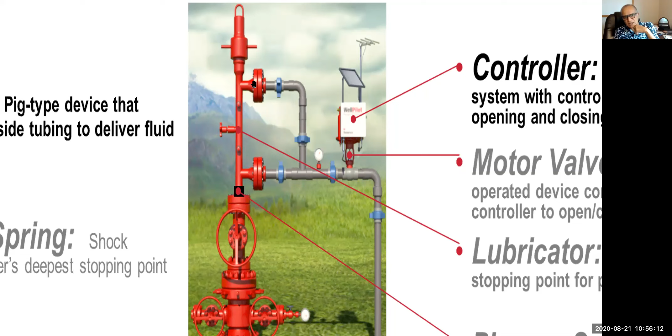There's a very important function played by this device called the motor valve. See, plunger lift wells typically again fall into that category of tired wells, meaning it has to build up some gas pressure inside the casing tubing annulus so that that gas can drive the plunger to the surface. So this motor valve periodically will open.

As the motor valve opens, the pressure decreases here, whereas the casing pressure that has built up because of the accumulated gas will start driving the plunger to the surface, right? So this motor valve is typically driven by some kind of controller. And as you can see, there is a solar panel here because you do not require any other electricity at the well site other than the electricity to drive this controller.

And you do not require a lot of electricity to drive this controller or the motor valve. That is one of the reasons why plunger lift is one of the cheapest lift methods you can think of, and that's why it's very popular. So application-wise, plunger lift is used to unload wells that continue to load up with produced wellbore liquid, and to reduce the fallback in wells being produced by intermittent gas lift.

And this is where I'm going to introduce one more acronym in your glossary called PAGL, plunger assisted gas lift. Some people also refer to it as GAPL, gas assisted plunger lift. This is where you are taking a combination of gas lift and plunger lift. It has become popular relatively recently as we are seeing intermittent production coming from unconventional wells. By intermittent, I mean sometimes we get a large liquid slug, sometimes nothing but gas, and then again a large liquid slug. That's where people are gravitating more and more towards gas lift, okay?

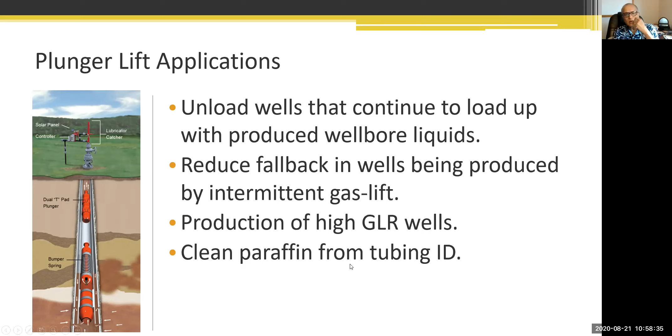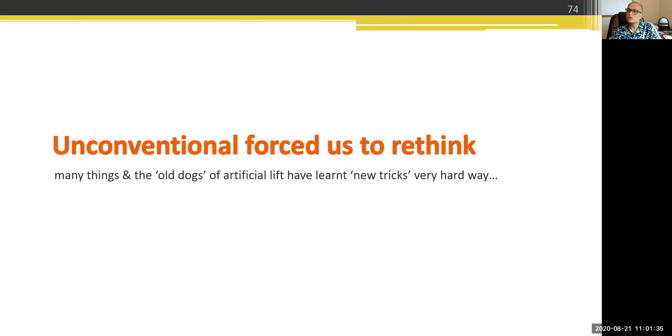Now we are going into the new trends. I've been constantly mentioning some of them, but let's go to unconventional. Until unconventional sprang onto the scene around the 2005 to 2008 time frame, we were doing gas lift conventionally, and we tried to apply some of those conventional tricks to unconventional, and the old dogs of artificial lift had to learn new tricks. And it was the very hard way, right?

This horizontal well revolution has really made us rethink lots of artificial lift approaches. And by the way, what you're listening to now is some of the slides from my 2016-2017 lecture series under SPE's Distinguished Lecturer Program.

What you're looking at here is the distribution of the lateral length, measured depth, and TVD. And when this slide was prepared in late 2016, what we saw was that on average, the lateral lengths were close to about 6,000, 8,000 feet long or so.

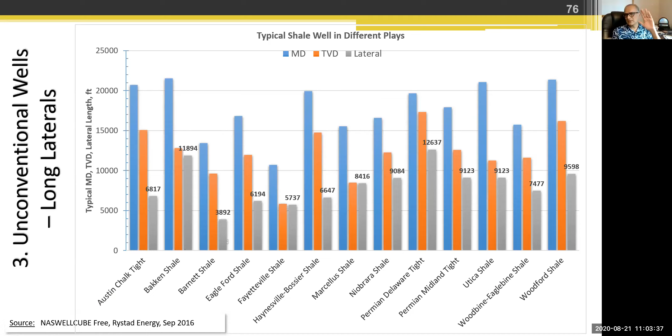Another thing to keep in mind is that what we call horizontal are not truly horizontal wells. Many of them are classified now as toe up, some of them are toe down, and most of them are what I would call hybrid or porpoising type of horizontal well. And why do I care about mentioning all of this? Because this type of lateral geometry impacts what type of fluid comes into the wellbore, with what velocity they come, what is their constitution when they come to the pumping device, right?

I'm not debating here which type of well geometry is better. All I'm pointing out is that because of these different geometries, the artificial lift mechanisms are seeing some flow structures that they are not designed to see. If you think from the perspective of the person who designs the equipment, what do they assume? They are assuming that you have very well homogenized fluid coming inside that device, whether it's a pump or whatever.

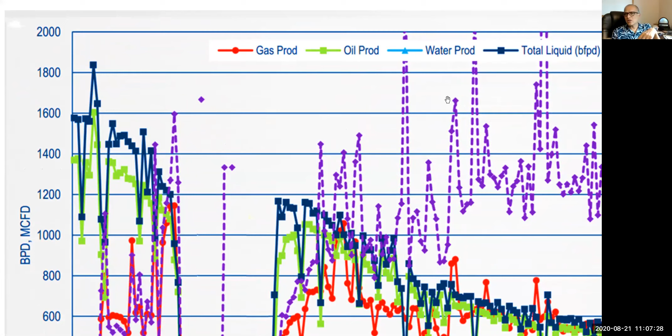And that issue manifests itself in two ways. First of all, when you look at the longer term impact, what you're looking at here is actual data from some well: the production profile in terms of gas, oil, water production, and the total liquid production. And what we are seeing is that the time frame is from September 2013 through maybe February 2014, so about a 6-month time frame, right? And over this 6 months, there is so much change in the barrels of liquid that pass through that well.

Now think of yourself, if you were designing the artificial lift for this well, at what flow rate would you design? Would you consider 800? Would you consider 1600? Would you consider what? This is one of the biggest challenges that artificial lift practitioners have run into with the horizontal well.

There is such a severe change in the production profile over such a short time period. Now you may recall that for some of the lift methods, in order to change that lift method, you have to call a rig on the well site. And if that is the case, are you going to call a rig every 2 months, 3 months on the well site? Even though onshore rig costs are reasonable, it's still lots of hassle, lots of deferred production. And that's what has happened in case of this well.

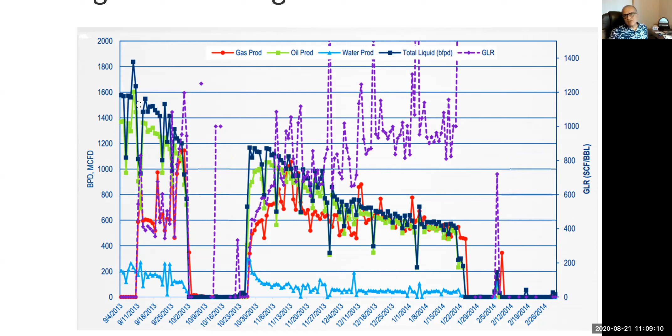There is one failure of the ESP here. There is a second failure of the ESP here. There is a third failure of the ESP here. Again, I'm not saying that ESPs are bad. What I'm saying is that because of such severe changes in the flow structures, the equipment are struggling and they fail because the designer could not envisage all these changes that were going to come that device's way in a 3 months time frame.

Traditionally, conventionally, if you have an active water aquifer, you're not going to see much change in the pressures. You're not going to see much change in the gas oil ratio. If you have solution gas drive, then you will see gas changes, but not such drastic changes. And here, what you're looking at is a short-term change.

Oh, sorry, I think I did something I didn't want to do. My apologies. I'll share again. I was trying to do something smart and it backfired. Okay, now you should see my presentation again. So what I'm showing you here are the measurements from 2 Eagle Ford wells. Again, I pressed the same button. Let me see if I can do that. My apologies, everybody. Am I sharing my screen? Yes. Okay. All right. Third time is the charm.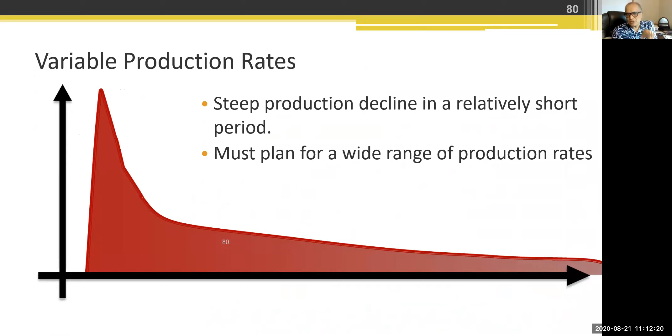So pumping is a big challenge, gas liquid separation is another challenge, monitoring is a big challenge, and back pressure management. So we have begun to realize that as we see the steep production decline in a relatively short time period, we need to plan for a wide range of production rates in a very short amount of time, and large fluctuations in those rates also. Meaning we have to rethink the entire way we are approaching lift planning.

Now, this is a very complex curve, and I came across this just a week ago in World Oil, June 2020. There is a very nice article if you're interested in ESP technology, where these people from Schlumberger focused on how ESP technology has evolved not only in conventional, but also in unconventional. So it's a very interesting case study. But the point I'm trying to make here is that this picture is from a Bakken Shale well.

In March 2015, the system curve says this well has to produce roughly about 5,600 barrels of liquid. The x-axis is the pumping rate, the y-axis is TDH. Remember our friend TDH, total dynamic head. So they needed a TDH of only 1,800 feet, or 800 PSI, roughly speaking, because the productivity was so strong, the reservoir was so strong.

Within a period of less than 1 month, by April 13th, 2015, the operating point moved to here, whereby our liquid production has gone to 3,200 barrels, and the demand for TDH has jumped to 5,200 feet. So all of a sudden, not only has your production volume decreased, but now the reservoir is saying, hey, I need more assistance from you.

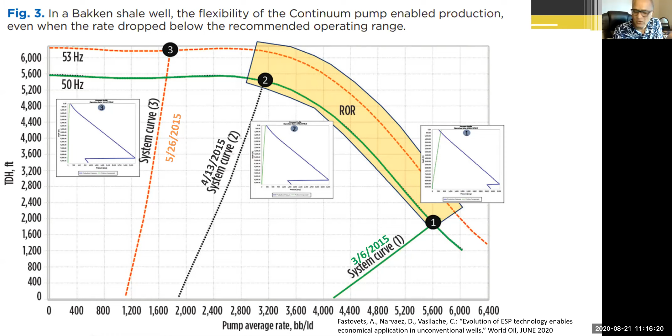For one well, if it's a liquid dominated production, most of the time what people do, they start with ESP, then they switch over to gas lift. At some point they switch over to rod lift. About a couple of years ago, Occidental came out and their artificial lift chief, who is now SPE's president, Shauna Noonan, made a statement that Oxy has decided to stick to gas lift, but different forms of gas lift.

Start with the continuous. At some point, you go with the gas-assisted plunger lift, plunger-assisted gas lift. Then you go to intermittent lift. Then you go to chamber lift. I did not talk about chamber lift. That's one of the more exotic forms of the gas lift.

Okay. So the industry consensus is that we need to be thinking more along the lines of life cycle, in order to achieve higher profitability, better productivity out of the same lift equipment, and not have a lot more failures on our hands. Otherwise, it would eat our lunch. And what do we mean by eat our lunch? Our OPEX will go through the roof and we will not make any money, and we'll have to P&A the well.

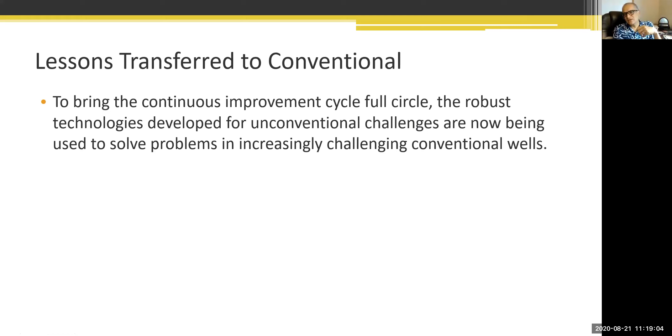Because conventional wells also have some challenging environments. Until now, people said, that is how it is, we can't change it. But now people are saying why can't we change it. If guys and gals can do it in the US of A, why can't we do it in this part of the world? So that's a kind of interesting shift in the artificial lift approaches. That brings us to the final part of my presentation.

Now, even though I said post-COVID-19 trends accelerator, this presentation could have been named as well: what is production optimization, what is digital oil field, and what it brings to the table in the current. Why I added post-COVID-19 trends? Because, by the way, this part of the presentation is from my second distinguished lecture series, which concluded last year.

I covered something like 30 countries, 50 locations in that lecture series in each and every continent except for Australia and Antarctica, right? And that's where my message was that we have to go towards the digital oil field. We have to adapt and accept some of these technologies in order for better profitability.

And now what has happened in this COVID era is that people have come to accept remote access. People have come to accept remote collaboration like what we are doing right now. It is no longer a question, like in some countries, and I would not name names, they have restrictions whereby once you go home from your work, you cannot do any work because you're not allowed to take laptops or any computer equipment out of the company premises. And now the same people are working from home, accessing their corporate resources. So that is more of a cultural shift that is going on.

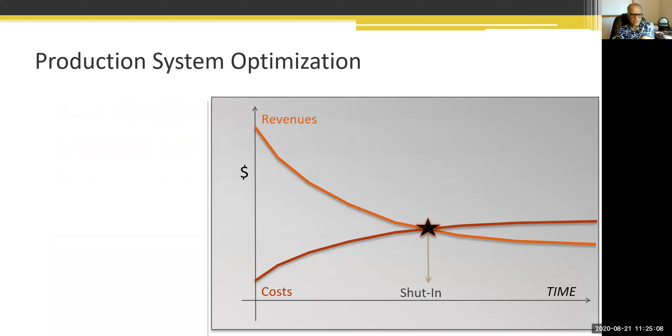But another thing that most people miss is that you have pushed your shut-in to some future date, meaning you are doing more with less for a longer time period. And this is what people are talking about a lot, doing more with less, right? And you have recovered some of the barrels which would have remained in the ground. That is the beauty, or the promise, of production system optimization,

meaning you are not maximizing the production, you're maximizing the profit over the life of the well, right? And a byproduct of that could be maximizing the production. But more importantly, you are also focusing on reducing the downtime, minimizing the OPEX, minimizing CAPEX, improving the HSE part of it. Because all of this has some impact on your bottom line, right?

So until now, production system optimization was sold with the promise of increasing production all the time, right? But now we have to be talking about rationalizing production with fewer downtimes, fewer fatalities, less OPEX and CAPEX. So basically we are talking about extending the economic life of the field and the economic life of the well. That is how our industry would survive. That is how we will survive personally also, right?

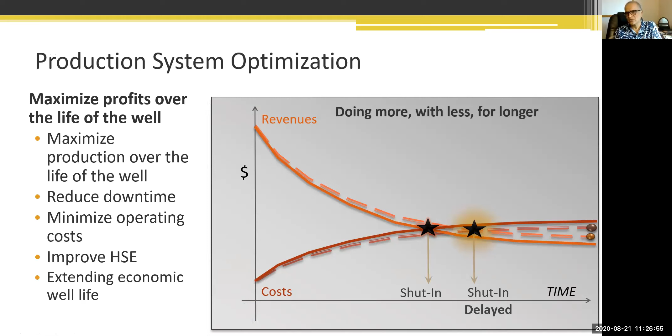So manual effort, where we used to send people out to the field to go and read and see whether the well is working or not. That worked, but one of the biggest causes of fatalities in the oil field is when people get behind the windscreen and start driving in some of the most dangerous terrain, right? So if we can avoid sending people out there, whereby we can access and manage the well operations remotely, then we can impact the QHSE aspect big time. Not only that, we can also focus on what to do with the data rather than sending people out to the field. So what is the infrastructure required?

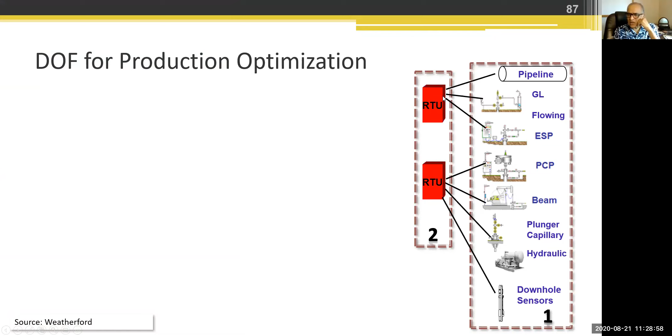Edge devices are a souped-up form of this controller, whereby you are doing more and more number crunching at the well site itself. Traditionally, these RTU devices were store-and-forward type devices with limited on-site control. Nowadays, we are in the world of edge control, E-D-G-E, if you have come across that terminology. What we are trying to do is put more and more powerful processors here which can consume this data stream at higher frequency, take some autonomous action, or at least forward that information onward.

So how do these boxes forward the information? There is a communication layer. You have either radio, satellite, or cellular based communication that sends this data signal to some data network. Increasingly now, companies like Microsoft and Google are getting into the oil business because they are trying to manage the cloud for you, and not only that, they are trying to introduce analytics in the cloud for you.

And that is one very promising career path for all of us, to look into some of those opportunities, in my opinion, right? And I'm an example of that. I changed myself whereby I'm focused more on these areas now.

So you have these cloud-based networks where you can have some type of apps or applications that are doing number crunching, that are doing some analysis. And then there are people behind that, people sitting in the field offices that are more focused on the tactical aspect of the business, meaning how do I monitor, how do I control, how do I keep a handle on the operations, right? Then there are some tactical people, some strategic people, field development people, corporate accountants, supply chain people, data management and IT folks.

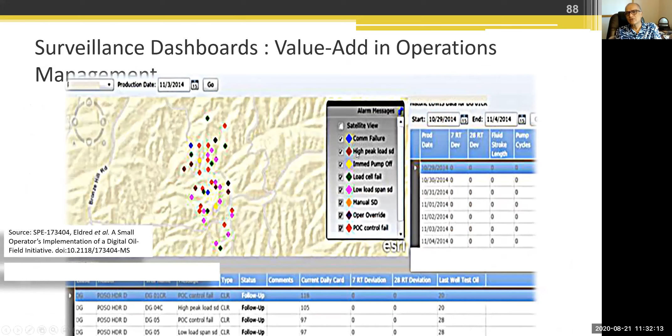Here is a picture that I have taken from one of the SPE presentations from a couple of years ago, where people are showing how they are using this type of dashboard for some value addition in the operations management of rod pump wells, right? But now the time has come to think beyond those dashboards. These dashboards have been around since last century, and I'm not exaggerating. Some of the earliest versions of computer-aided optimization for operations were in place in Shell in the 80s, I would say,

or even slightly earlier. But now we need to go from this retrospective dashboard to the future, which is we have to go more into the descriptive aspect, which is visualization. Then we have to go into the predictive aspect, whereby we can predict before things happen. And then prescriptive, meaning what to do about it. And that's where significant productivity gains are being promised by lots of companies coming into our space. Not only our space, all the spaces.

This company that I'm working with, Fathom Solutions out of Saudi Arabia, is a technology startup company. And the same type of paradigms are evolving in that company in different aspects, whether it's supply chain, the utility side, or oil and gas. Actually, the company CEO was telling me that more than upstream, he's seeing a lot more activity in other areas, because everywhere people are embracing this digital revolution. Some people refer to it as Industry 4.0, and that is a big buzzword also.

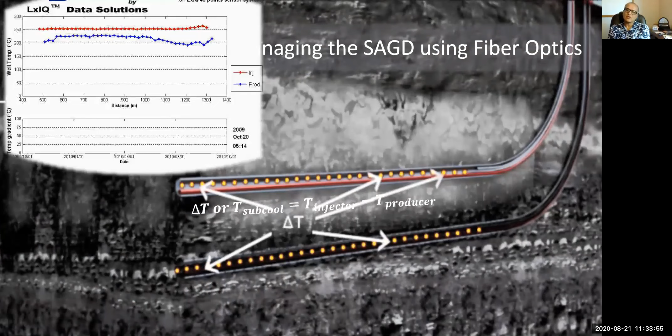So now here I'm giving you one example, and it's very impressive. What you're looking at is a SAGD well, and this is an example of how visualization can help you. What you're looking at is a wellbore where you're injecting steam at the surface, and down below is a producing wellbore. So all this steam melts the bitumen, which is being picked up here, and these yellow dots that you are seeing along the wellbore and this red line represent the fiber optics based data capturing devices.

That brings me to another discussion. Fiber optics can capture data to the tune of, in one day, some of the distributed acoustic sensing, DAS, can capture up to 1 terabyte of data per day. Now visualize, we were in the age of charts, and now we have come to the age where we are capturing more than a gigabyte of data. And not too long ago, we did not even have hard disks able to capture more than 500 gigabytes. Here we are talking about 1 terabyte of data spewing out of the wellbore every day. That is one of the bigger challenges I'm working on with one of the big operators in the world.

So here, what you're looking at is how we are monitoring the temperature of the steam injectors and the producer. By the way, there is an artificial lift angle here, and that's why I included this. There is an ESP sitting here. So this ESP needs to be run in conjunction with this temperature sensing that is going on. So this is a small example of visual sensing.

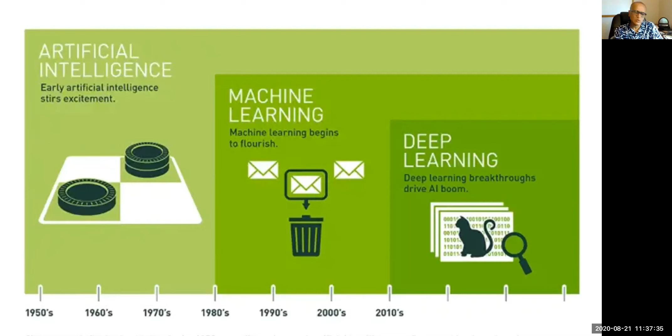So here is one example that I picked up from one company's presentation, where they tried to explain how they are using a machine learning approach to understand what is happening inside a rod pump well. What they are selling is effectively a hockey puck shaped device. If you are a fan of ice hockey, you can visualize the size of the hockey puck, right? They install it on the rod pumping machinery that I was showing earlier. And that device also has edge features in it, meaning it senses how much load it experiences and where the pump is in its cycle. And based on that, it develops what is called a dynamometer card.

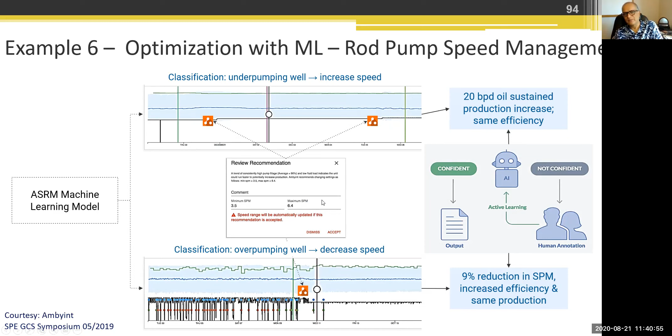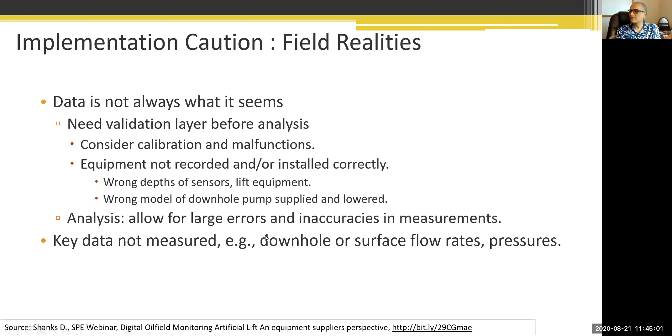I just inserted this picture. Nobody is wearing a mask because this predates the pandemic and this is marketing literature. But the idea is that being able to have access to people who are in different parts of the world with different knowledge bases is a must. As I pointed out, in order to understand, analyze, design, and operate artificial lift, you require multiple discipline knowledge outside of production engineering. You have to know electrical engineering, you have to understand data structures, you have to understand machine learning and whatnot.

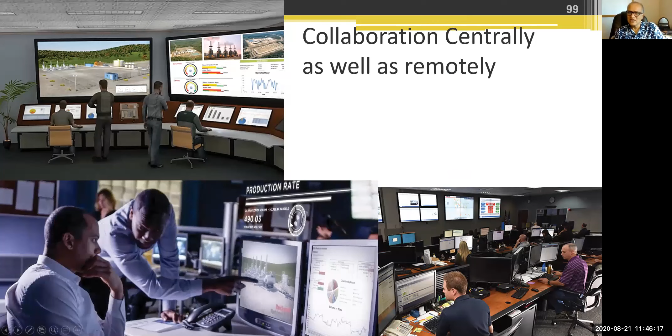And not a single person can capture all of that. That's where the collaboration is a must. So we have numerous success stories out there. In spite of what I said, there is better and better data capture and transmission occurring. There is software integration occurring. AI, ML, edge devices are invading. Are we ready? Are we ready to evaluate them? Or are we going to take it at face value of what vendors are selling us?

Thank you so much, Rajan. It was a wonderful presentation, even though it was a little longer than you originally designed it to be, but that's fine. Those who are dedicated people, they will hang around. So should we go to the Q&A session now, just to see what questions are out there? Hello? Yep. You're asking me? No, I'm asking our attendees as well. Well, I suggest, in case we run out of time, why don't we let Rajan choose those questions that would be of interest to the majority of the audience.